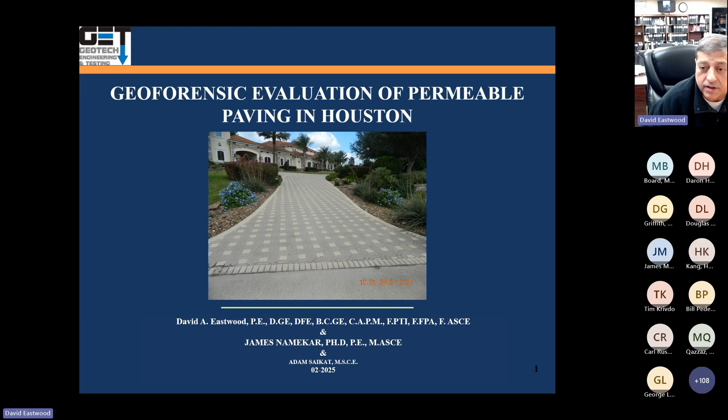Permeable pavers are used in residential and commercial projects, and they kind of work like a detention pond, essentially, underneath the paving. Today we have a lot of engineers that have registered.

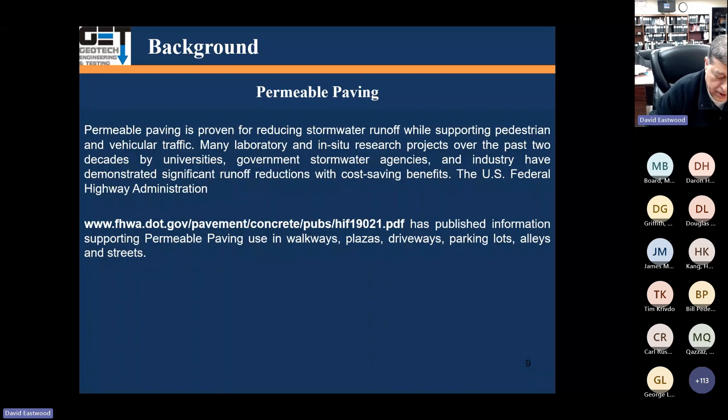cost saving benefits in terms of storage. FHWA has got a good program on that, so you can look at the FHWA manual on permeable pavers.

Typical use of the pavers, you see them all over the place. If you go to the City of Sugar Land, you can see this out there. They have pavers out there, some of them are permeable, some of them are not. And the City of Sugar Land, you see them all over the Woodlands area, so they've got them all over the place.

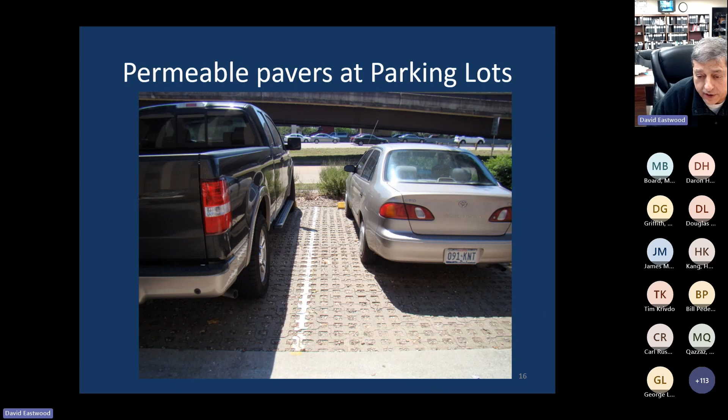They use them for parking. This is Harris County flood control. You go out there and they have this parking area where they've got pavers, permeable. Again, there's parking lots, more parking lots.

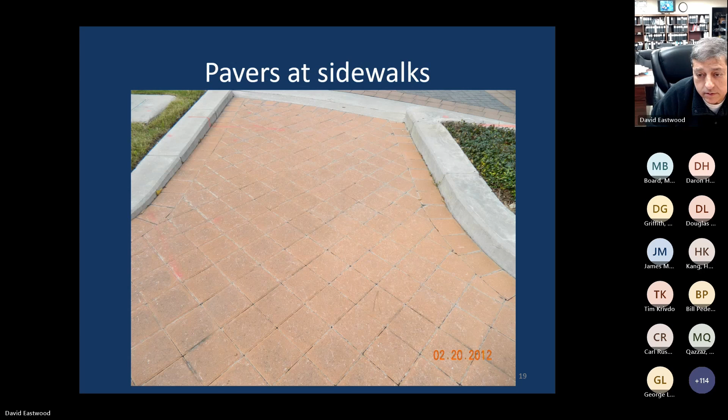That's a typical kind of sidewalk deal. Again, some of these are permeable, some of them are not. Sidewalks, driveways, more driveways.

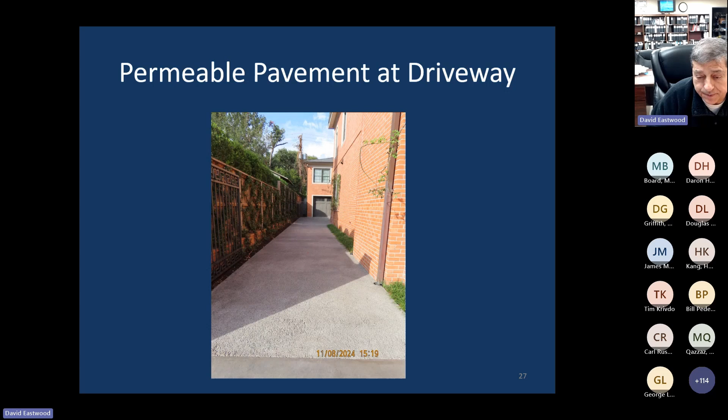That's permeable paving here, really a good system out there. We're going to test this thing here. Permeable paving is made out of aggregates and concrete. Water flows right through it very easily.

Permeable pavers: the typical design on these things, you can see the paver itself, with an open graded bedding course underneath it. Below that, you've got an open graded base reservoir, and the sub base underneath of that is also open graded. Open graded means the aggregates have voids in them and don't have a nice gradation.

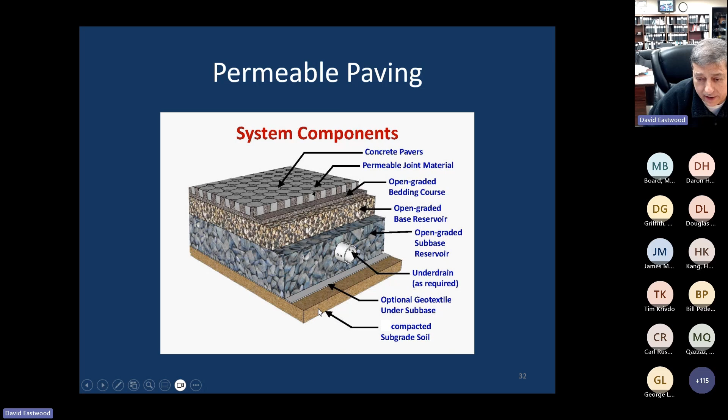And then, if you need a drain, underneath that you've got the geotextile fabric - most of them do have that - and the compacted subgrade. These subgrades should be stabilized if you've got heavy traffic. If you're doing a driveway or a little parking lot, you may not need to stabilize it, but we recommend stabilization.

Here's another drawing from Keystone that shows the paver. They've got the layer of aggregate in here, the bedding course, basically about 2 inches of number 8 stone, and below that they come in with a 4-inch minimum thickness of number 57 stone.

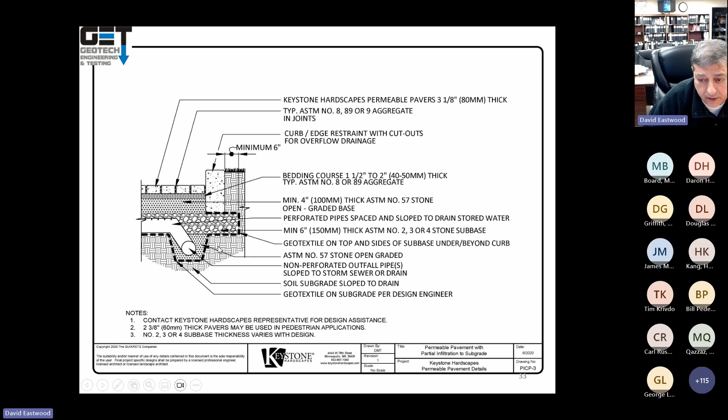Below that they come in with, of course, here's the geotextile, here's another set of aggregates, and then you got the drain pipe. So it's kind of involved. And here is the subgrade, which has got to be compacted.

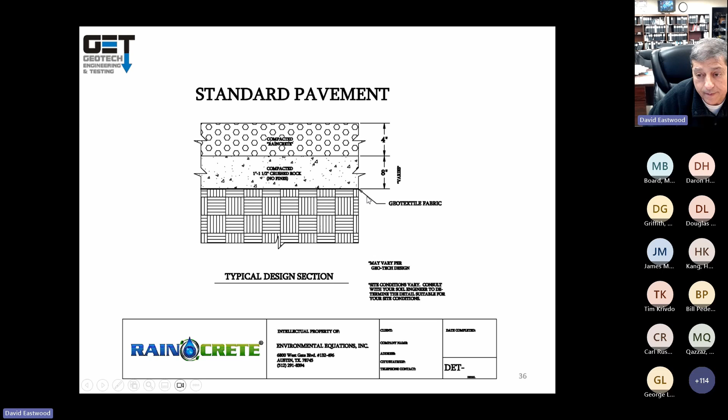Here, it'd be really nice to stabilize this. If it's clay, lime stabilize it. If it's sandy soil, you do lime fly ash, like 8 inches, before you put this in for pavements. And definitely for heavy pavements, you got 4 and 8 geotextile fabric. Again, we recommend lime stabilization in clay, 8 inches, or lime fly ash in sandy soils. Makes it last a lot longer.

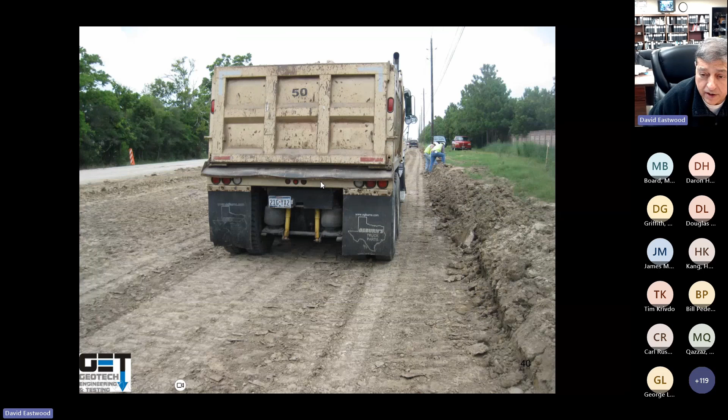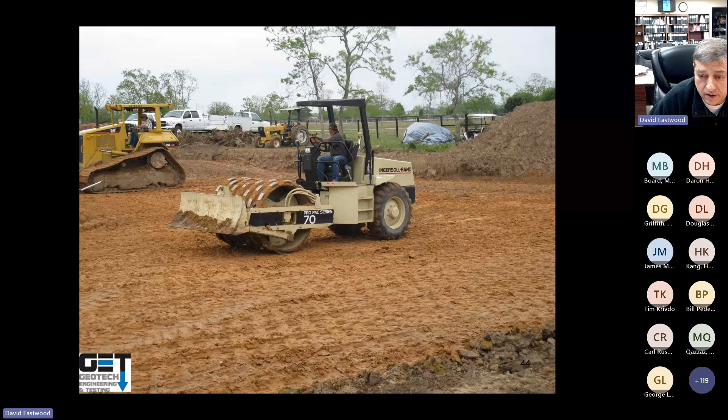Construction wise, you got to go out there and do the proof roll on that subgrade. Get a loaded dump truck, about 25 to 50 tons, and run on it. Make sure you don't have rutting, it's not acceptable. You got to compact that soil, if it's clay, with a sheep's foot. And if it's sandy, of course, you compact it with a steel drum roller. Make sure it's nice and compacted, 95% standard Proctor density.

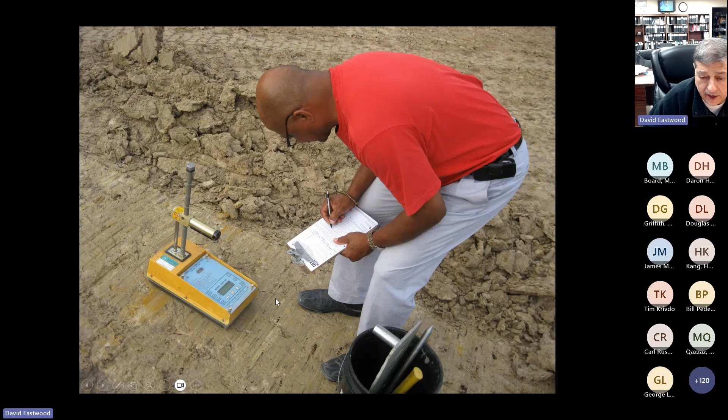That's the compacted soil with a sheep's foot. You run the density test with a nuclear gauge, make sure this passes the density. Again, if you got heavy loads on it, like a roadway or something, I would recommend chemical stabilization, lime or lime fly ash, depending on the soil. If your soil is clay, use lime. If it's sandy, use lime fly ash.

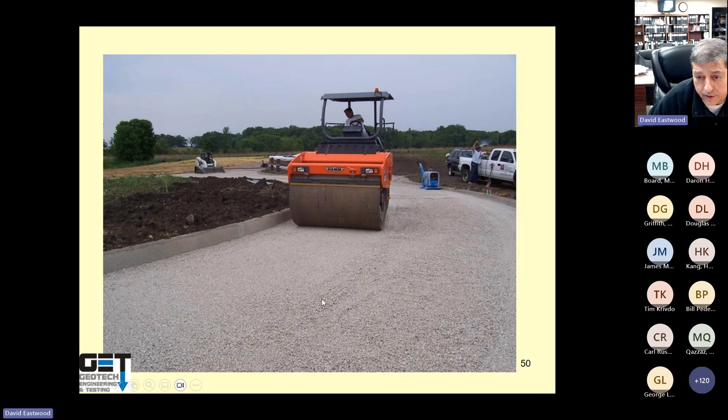And then you put your aggregate on, compacted aggregate. Here's a steel drum roller going out there and compacting it. Make sure you run density tests on the base, make sure everything is nice and compacted, 100% modified Proctor for compaction for your base material.

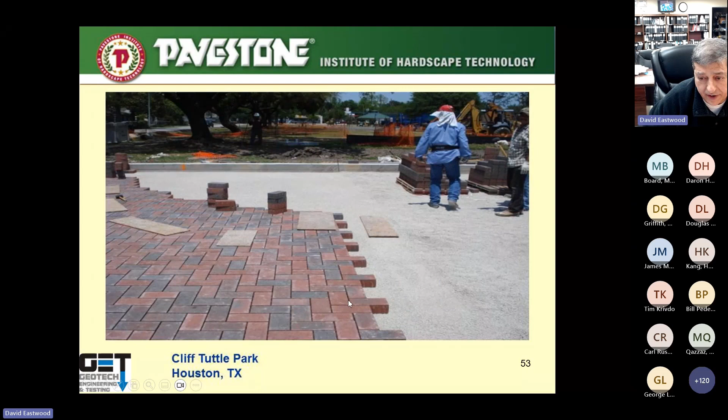And to start putting the paver on, you lay it out there, put them right next to each other. Typically, if you got permeable pavers, you got aggregates in between the pavers. Here's another slide showing the base, and then you put the paver on top of it.

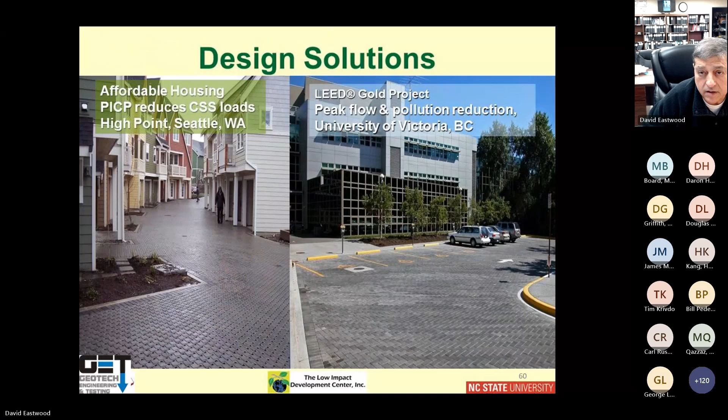Traffic loading, again, as we discussed, we use this for parking lots. These are various uses of pavers. They're beautiful, you can carry loads, you know, you got a fire truck.

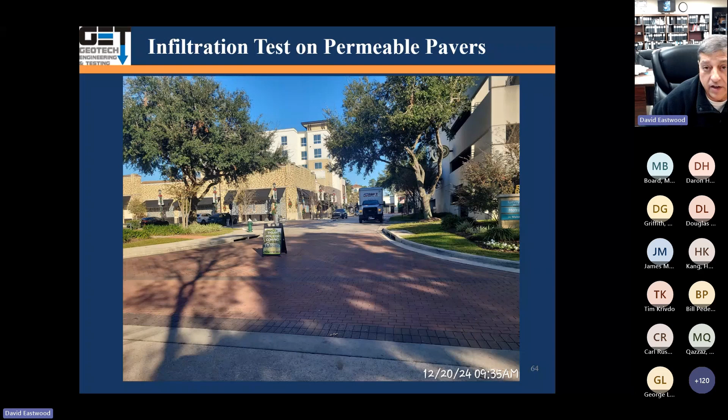So, road reconstruction. One of the things we want to know is, for some of these pavers, what kind of infiltration they have, how much water can go through them. So we picked a location and used this device, a kind of cylindrical thing, about 12 inches in diameter, 24 inches tall. This is the ASTM standard for running the test.

You go in there and put some plumber's putty in there because we don't want it to leak. Put it in, and then you slide that on top of it.

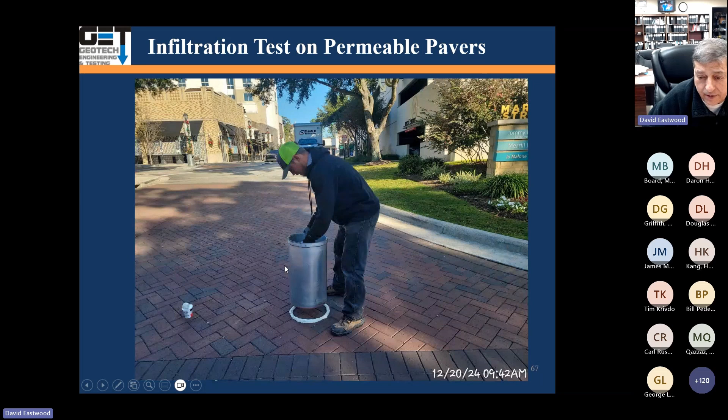Still don't see any questions, so I don't know if there is a question or not. But anyway...

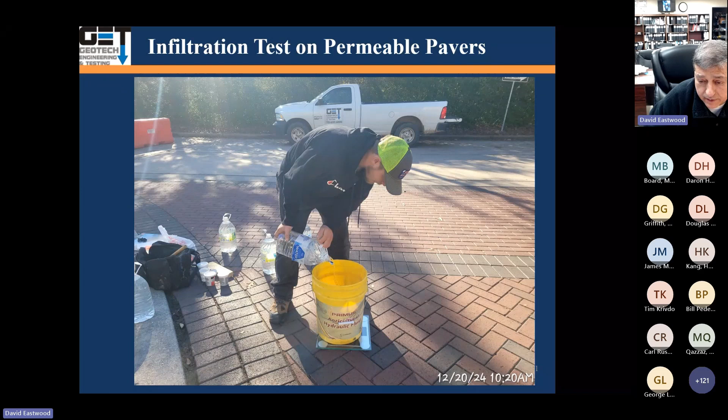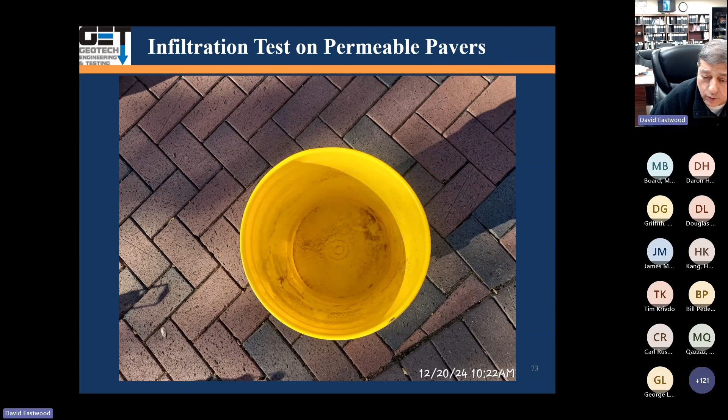You put that cone in there, the cylinder on top of it, and make sure it's sealed. Make sure you seal the inside of it, make sure it's nice and sealed out there. You add water to it, and basically you put a bucket there, you weigh it, and then add water to it. You add about 8 pounds of water, just pre-wet it with 8 pounds of water.

And then you pour water in there. If the water sits there and doesn't go anywhere, you add another 8 pounds. You just monitor it and see how fast the water flows through it. If it goes through within 30 seconds, then you add 40 pounds of water to it, and you monitor the water flow through it.

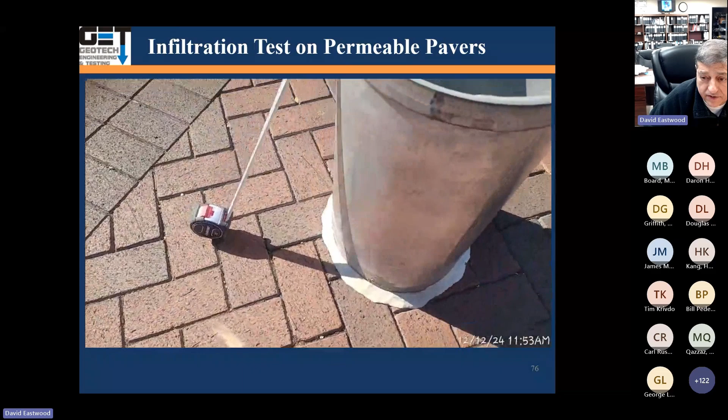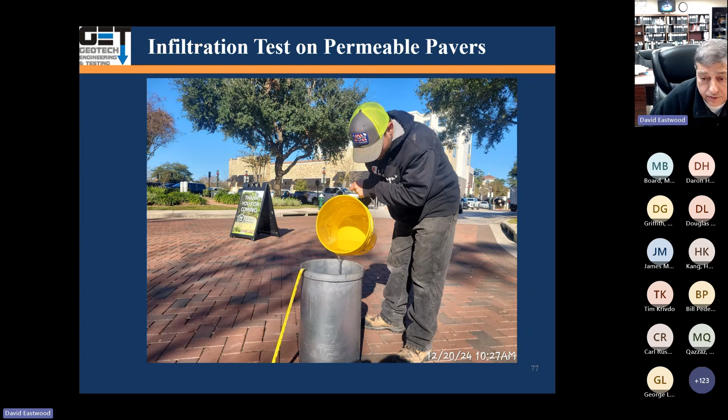This kind of shows the test being run. It's the plumber's putty, you can see the cylinder, and you got the water just sitting there, not going anywhere. If the water's not going anywhere, you add another 8 pounds of water to it, and try to run the test. And if it's going somewhere, you measure the infiltration. In this case, water starts flowing.

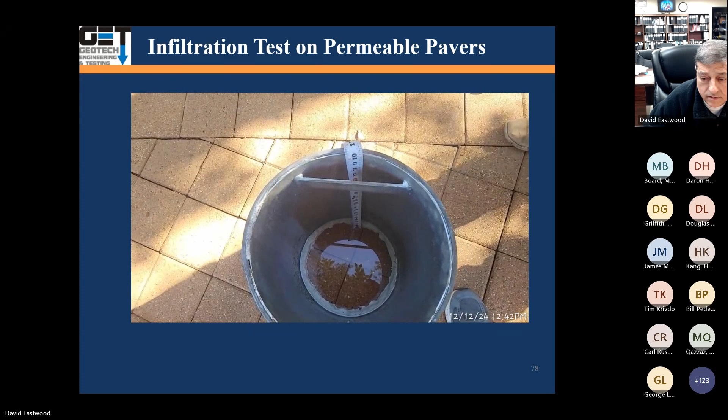We picked up a case study for a project that had permeable pavers, Rain Creek—that's the commercial name for it. They wanted to know how permeable it was. It was basically a case where there was a dispute about how permeable these permeable pavements are. So we compared that to natural soils, and we compared it to concrete paving, and of course to permeable pavers. For that, we did field work, field exploration, lab testing, engineering analysis, and results conclusion.

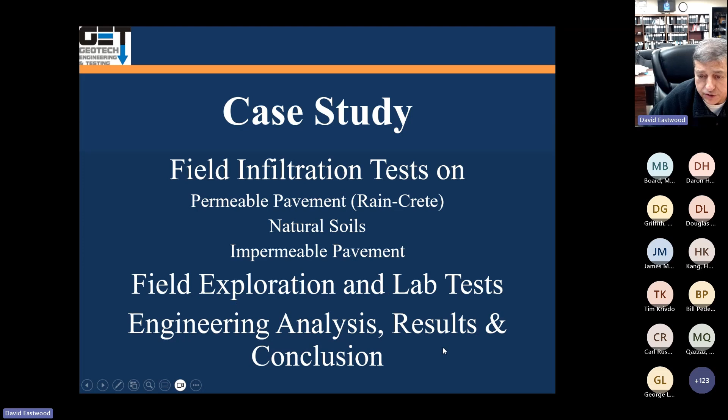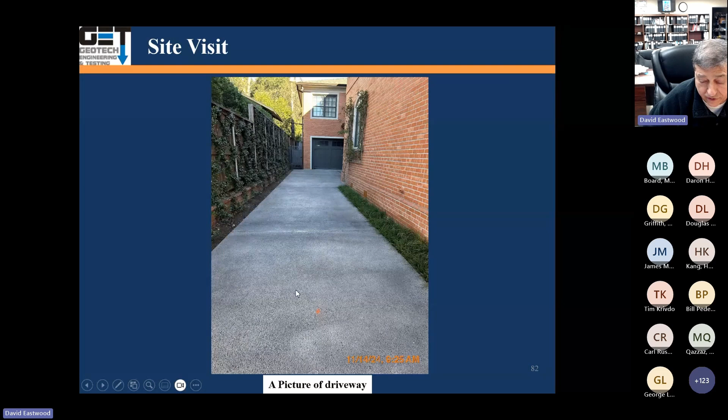The infiltration test we did was according to ASTM C1781.

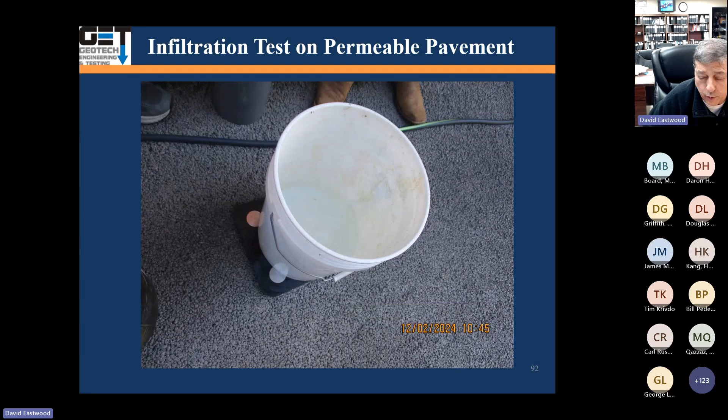Here's the pavement. We put the cone in here, the cylinder, and put the plumber's putty, weighed the water. We pre-wet it with 8 pounds of water. Within 30 seconds, all that water went away. Here's pouring the water, and you can see how permeable this paver is—the water just runs right out of there.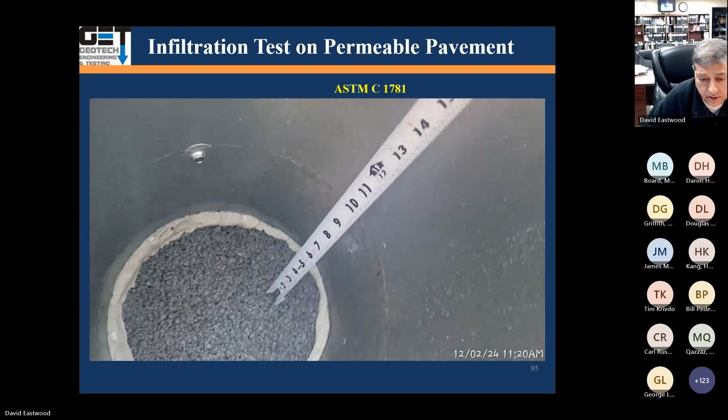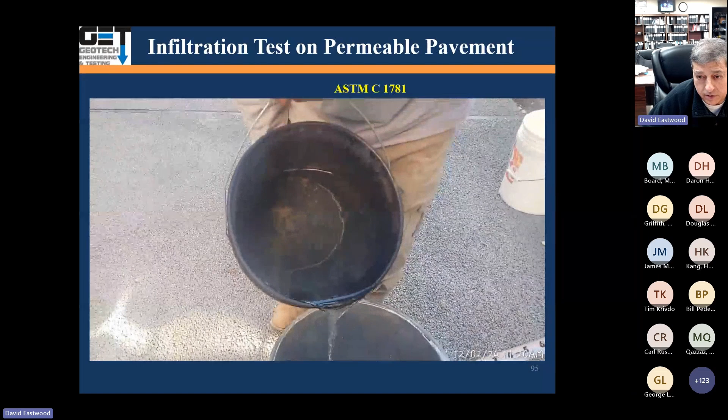You can't hold any water. That's a very permeable paver there. Then we pour more water in there—a whole bucket of water. It still wouldn't hold it; the water just flows right through it.

It's a great system, this drain-crete system is pretty good. Underneath it, it's got gap-graded rock, a limestone base.

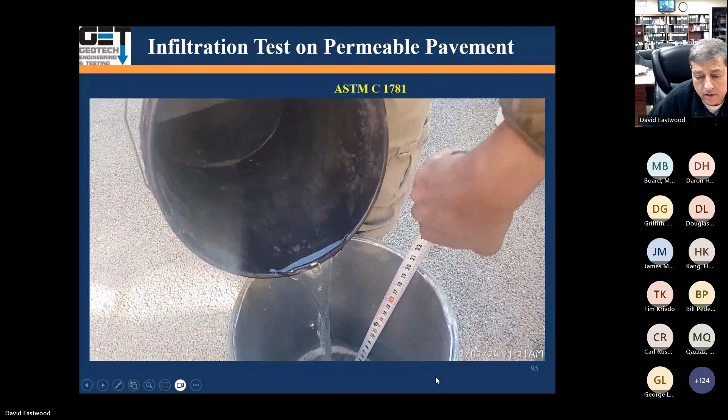So any water we put in there just went away. We took it off.

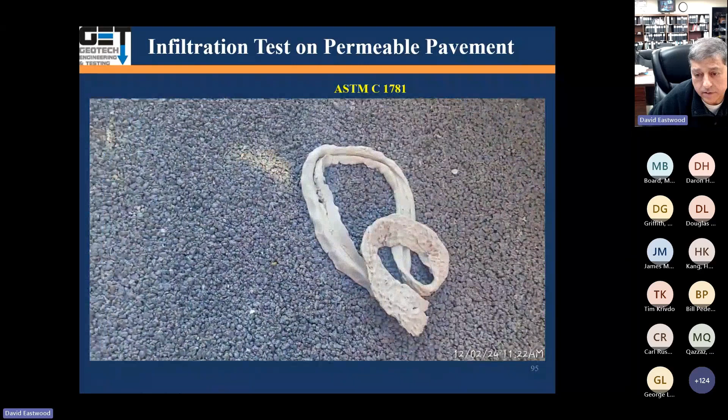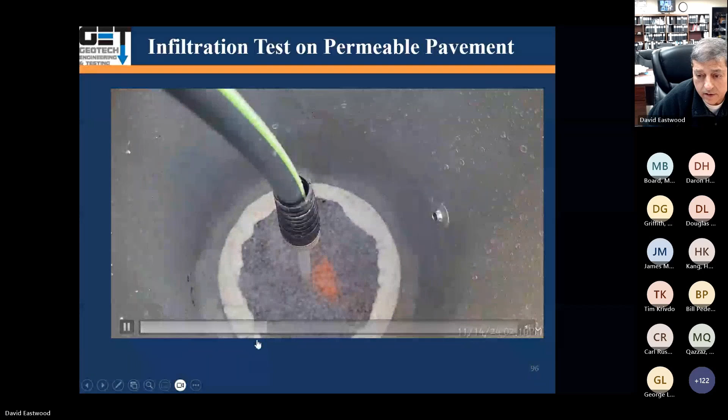Here's another one—we actually put a water hose in there because it used up all the water in the bucket. So in this test, we just put a water hose in there to see how much water it can hold, and it just sucked up all the water. It's so permeable that even with a water hose in it, this thing basically drains right through.

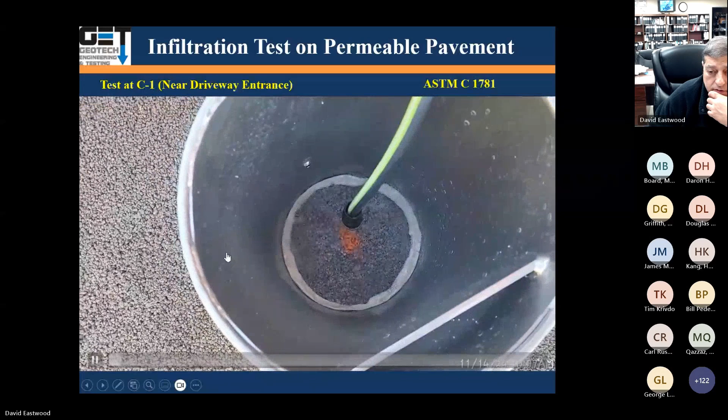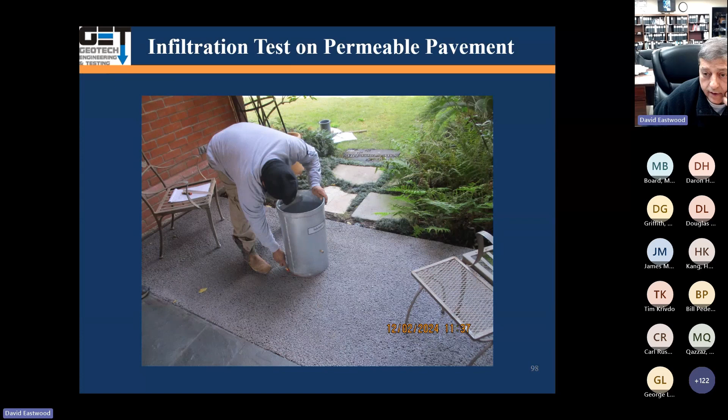Here's another one, Test C1, near the driveway entrance. We ran another test out there on another part of the permeable paver. Again, put the cylinder there, put the putty on it, put water in it, pre-wetted with 8 pounds. Within 30 seconds, all the water went away. Again, the same thing—put a lot of water, a bucket of water, at that test location, and you can see how permeable it is.

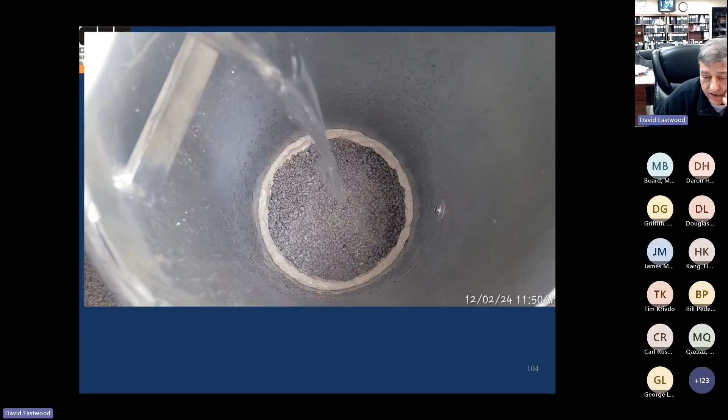In fact, you put a hose in there, it does the same thing—it uses up all the water. Basically, all the water will go through. They're just pouring water and the water goes away.

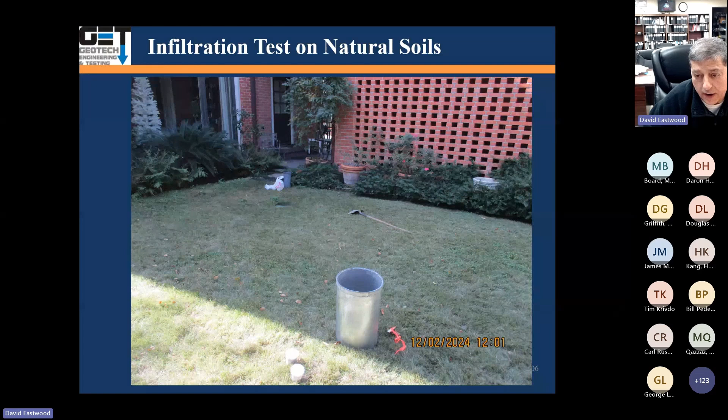Now, one of the things we did—we said this is permeable, but they wanted to compare that to the natural ground, because the attorneys will say we want to show this is more permeable than natural soils. So we went out there and set the cylinder up on top of natural soil, drove it into the soil, and got ready with 8 pounds of water, along with the plumber's putty.

You can see in here, you've got the grass. We start pouring water in it; it starts holding water. We pour more water in it; it was holding water. The water did dissipate within 30 seconds, so we had to add another 40 pounds of water to it.

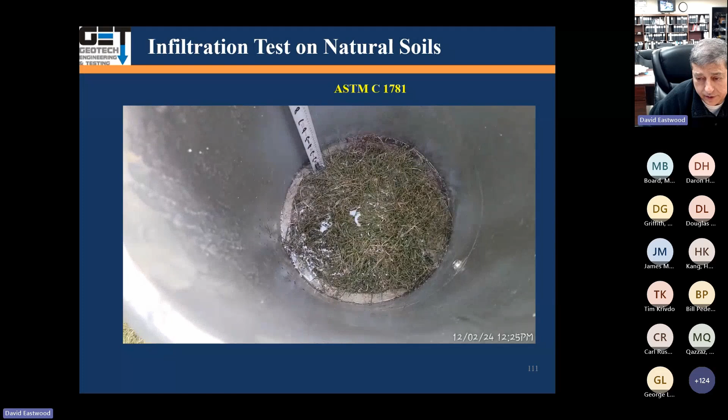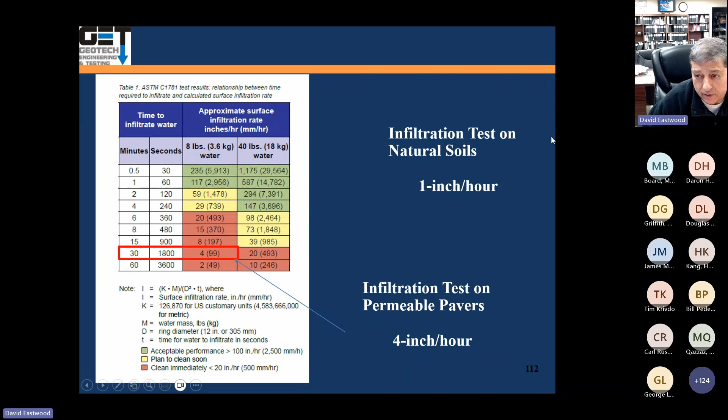We measure the water drop as a function of time. In this case, for natural soil, we found it was 1 inch per hour—the head dropped 1 inch per hour. For the permeable paver that was dirty, it was 4 inches per hour. So basically, natural soils were pretty bad—only 1 inch per hour—there wasn't that much drainage on natural soils.

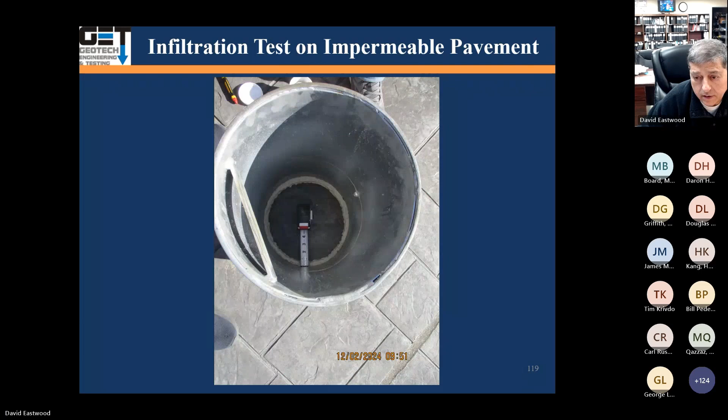So the attorneys asked us, why don't we just do the infiltration test on regular concrete? We went out there—they had a concrete driveway, solid patterned concrete. We set it up, weighed this thing, and put the plumber's putty, sealed it, and started to add water to it.

Again, this is patterned concrete. We expected it to hold water, that no water would go away. So we poured the water, it was sealed, and it just sat there—didn't go anywhere. We measured permeability of 0 per hour. We monitored for 1 hour, 60 minutes—it was 0. The water just sat there.

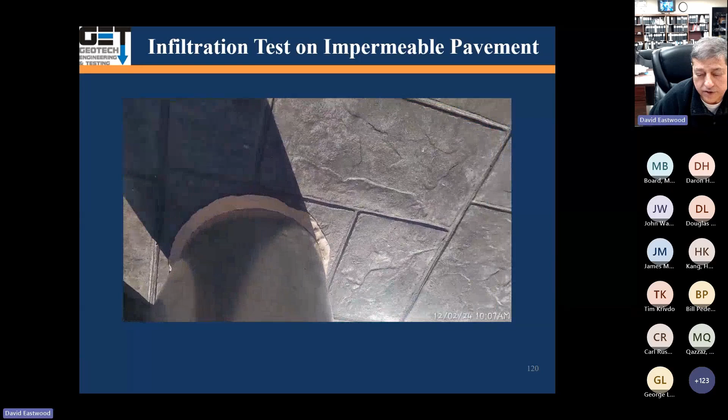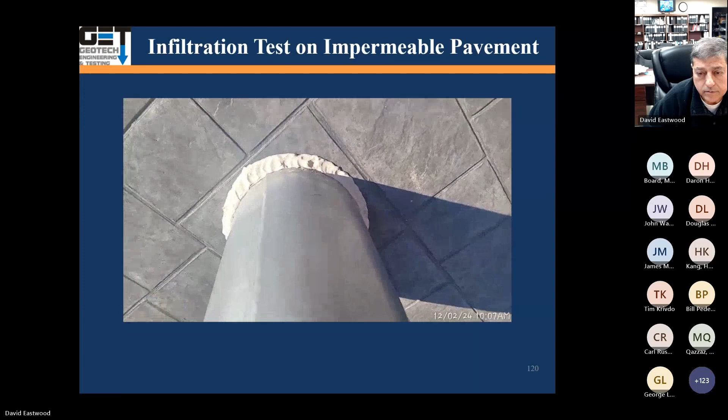So here's another video. We poured more water in there, 40 pounds of water, to see what it does.

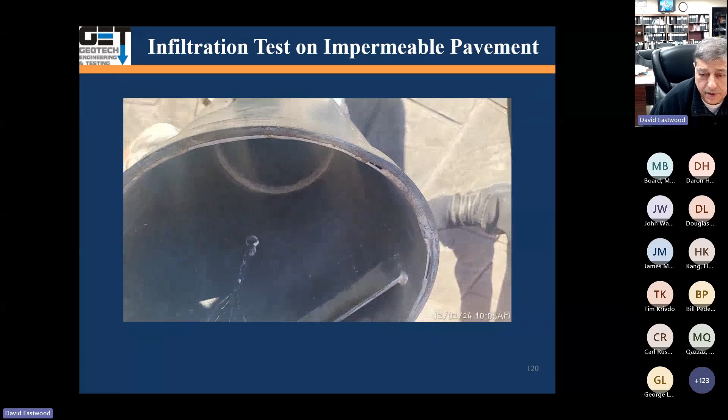And as you can see, water just sits there. It doesn't penetrate anywhere. That's impermeable, regular pattern concrete.

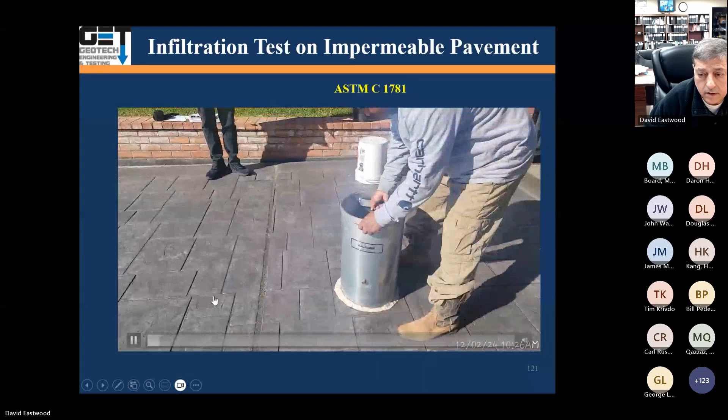So we took it off. All the water came out of the bottom. We put more water in there again, and water came out. So pattern concrete had a permeability of 0.

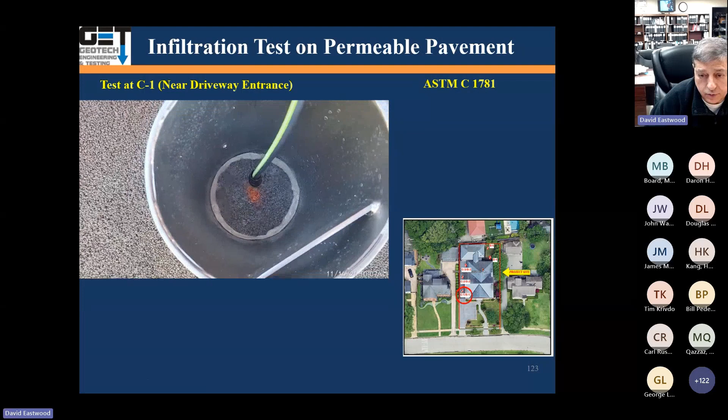Again, on test C1, we put a hose in it right here on that driveway. This shows no matter how much water you put in there on the permeable pavement part, water just basically goes away into the reservoir of the aggregate underneath it.

So it's an awesome product. You can see the water just going in there. That's test number C2.

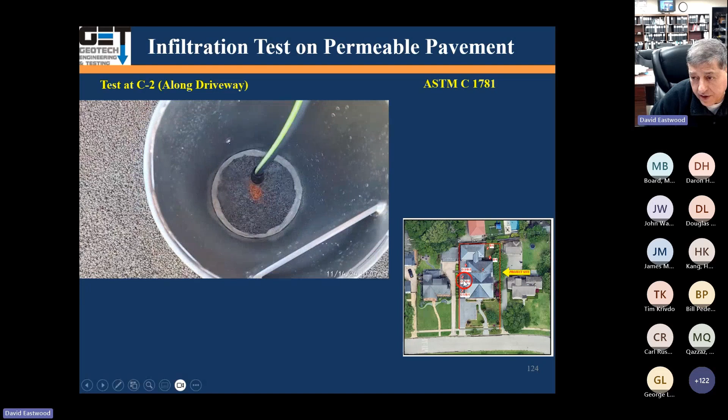This was C1, C2, and we have, of course, C3, where we did the impermeable tests on this natural soil.

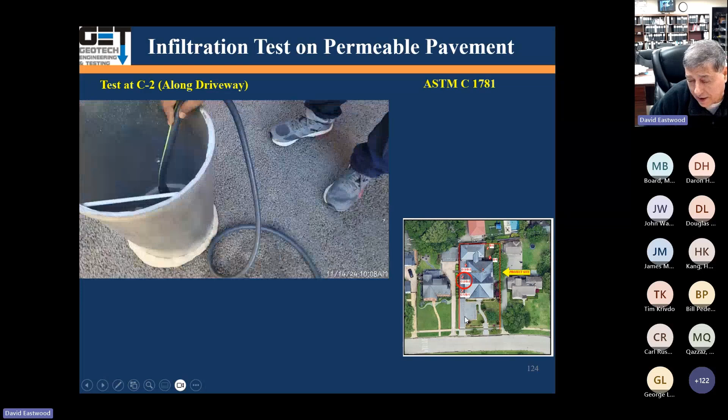And here's the impermeable paver right here, this regular pattern concrete. This is C2. We put a hose in there and just everything goes.

So what we measured, based on ASTM C1781, C1, C2, and C3, we had more than 1,200 inches of water per hour. I mean, that water just flew right through it.

What natural soil was, the permeability was 1.0, which was 1 inch per hour. For impermeable concrete right here, we had 0. The water just sat there, didn't go anywhere.

...drains at a rate of about 1,175 inches per hour, which is very close to what we measured here for permeable pavement. So they are equal.

So a good permeable paver drains as good as the raincrete we tested, unless they're dirty, then they've got to get cleaned up. Natural soil was 1.0, impermeable concrete was 0.

So we went out there to see what we got over there on those permeable pavements, what the structure of it was. We did some coring, drilling, sampling, and backfilling.

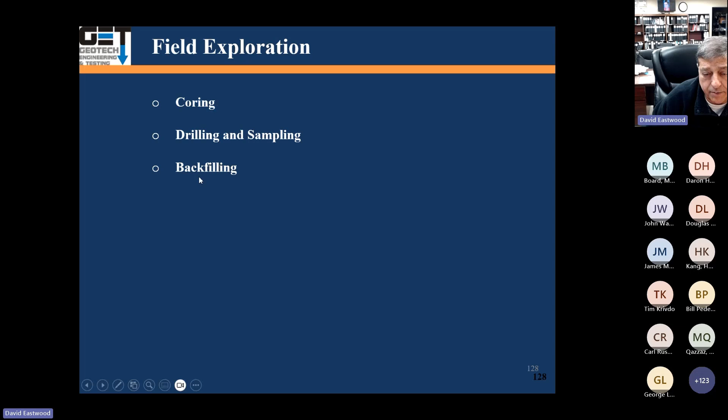So the design was 4 inches of compacted raincrete permeable pavement for a residential driveway. Below that, we had 4 inches of gap-graded limestone, and below that, we had natural soil, compacted.

Key specification for raincrete, which is the material that was used for permeable pavement, over natural soil, compacted without debris or waste. They said the system will have a permeability of about 288 inches per hour. Our test showed greater than 1,200 inches per hour.

Base material consists of ASTM C33 concrete aggregates: 100% passing number 1.5 inch, 95% to 100% passing 1 inch, 25% to 60% passing through half an inch, and 0 to 10% passing number 4.

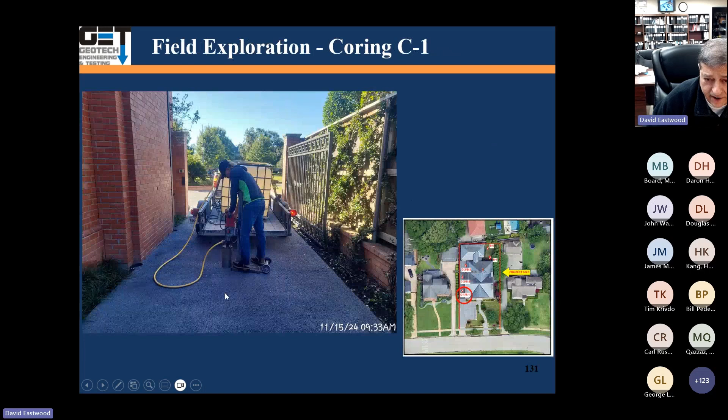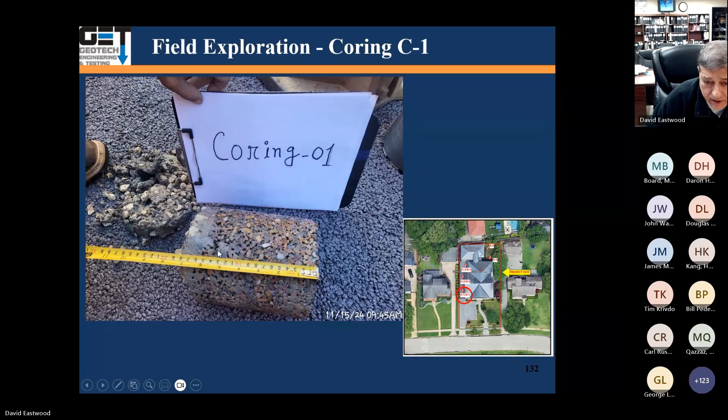So we cored this thing here. That's coring C1, and that's what the aggregate looks like here. Basically, raincrete—you can see it like that. It's got gap-graded aggregates.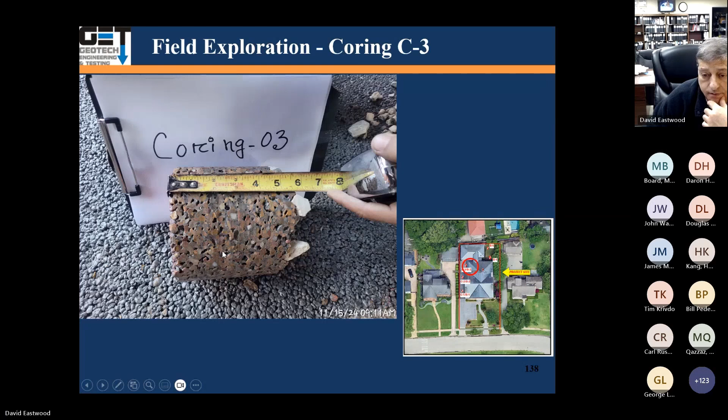Below that, we found this aggregate. It's a limestone aggregate, gap-graded aggregate. We tried to get some sample underneath it.

We found fabric and then natural soil. It was a sandy clay material, lean clay. We used a portable rig we have to get our sample.

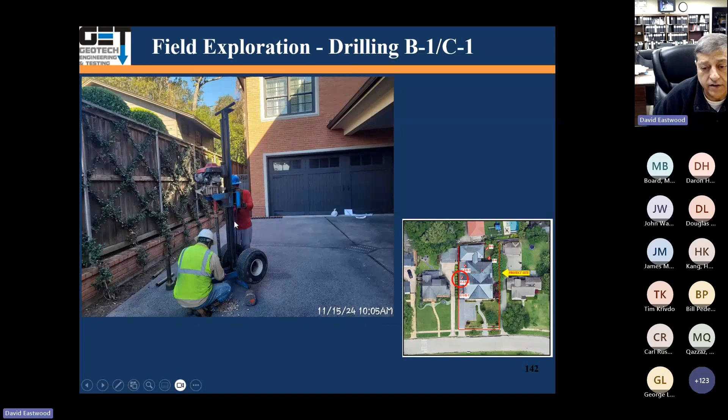We did the same thing with the natural soil. We went in the backyard to see what kind of soil we have there, and we got samples of it. After we got the sample, we backfilled the hole with gravel.

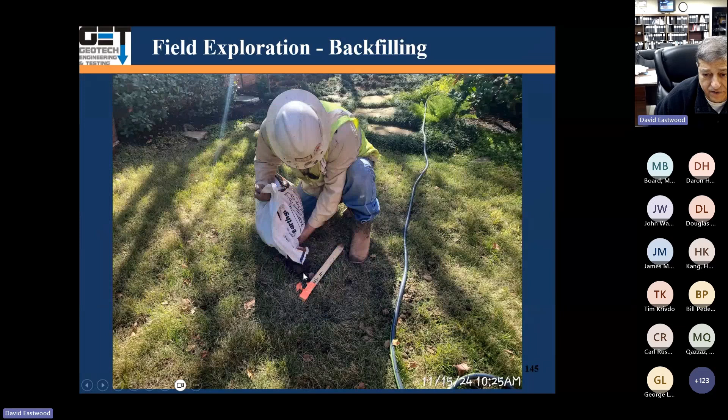Well, actually, in the backyard, we used the topsoil to backfill the holes, and in the paver areas, we used aggregate to fill the hole. They had to come back in and repair them.

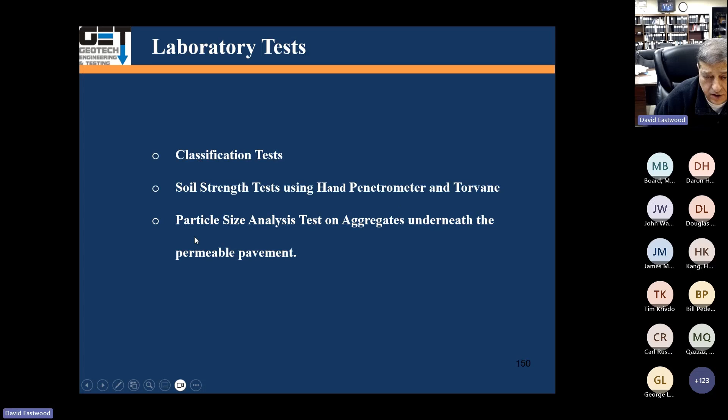Laboratory testing: we did some classification tests, strength tests, and gradation tests on the aggregates. The soil, basically, we found 0 to 2 feet consisted of lean clay with PIs between 18 to 29, strengths of about 0.31 to 0.62 tons per square foot.

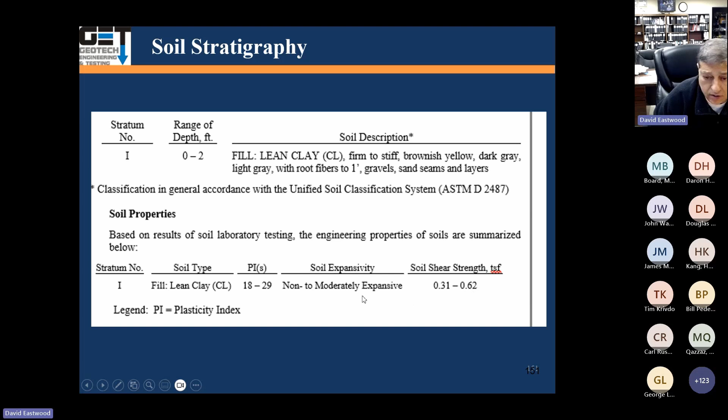Moderately strong, low PI essentially, 18 to 29 is not that expansive. We talked about the specifications of the raincrete.

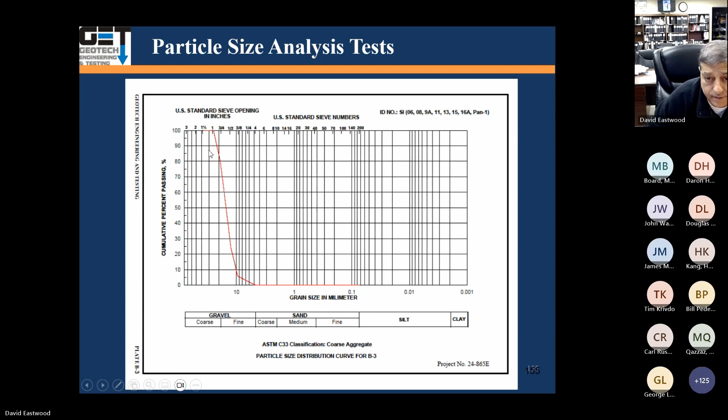So basically what we did, an engineering analysis: we looked at permeable pavement structure, field infiltration tests, and comparison of infiltration rate in permeable pavements and permeable pavers, natural soils, and impermeable concrete.

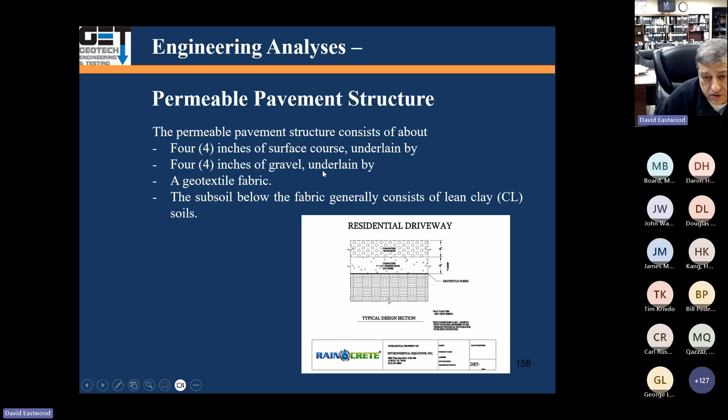For a residential driveway, we had 4 inches of this raincrete, that 4 inches of surface course underlain by 4 inches of gravel or limestone. Then a geotextile fabric. Subsoil consists basically of lean clay.

And the permeabilities that we measured: for clean pavers and permeable pavements, the flow is going to be more than 1,200 inches per hour. For natural soil, we measured 1.0, or 1 inch per hour. Of course, impermeable was 0.

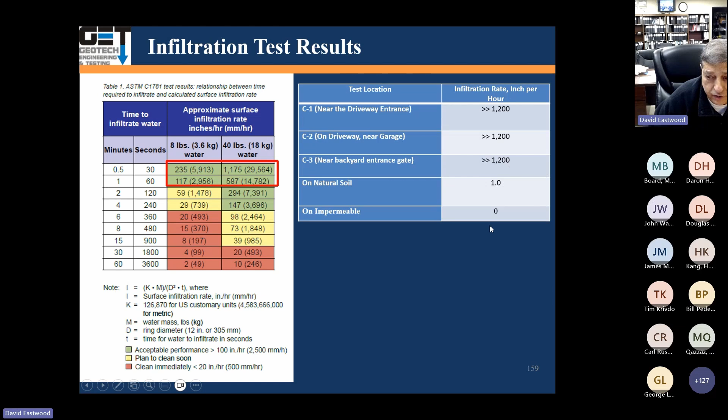So the field infiltration test, a review of the infiltration test for the pavements, indicates that infiltration tests for pavers and permeable pavements is more than 1,200 inches per hour. Infiltration test in natural soils was 1 inch per hour based on resultant infiltration tests. Permeable pavement permeability is much greater than natural soils for infiltration.

Comparison of infiltration rate of on-site permeable pavement and permeable paving. The infiltration rate for the permeable pavers we tested was 4 inches per hour, which was dirty. The infiltration rate for permeable pavement we measured was 1,200 inches per hour. The infiltration rate for natural soil was 1 inch per hour. For concrete, solid concrete, it was 0.

Therefore, permeable pavement had superior infiltration rate compared to permeable pavers, although they're going to have very similar infiltration if the permeable pavers are clean.

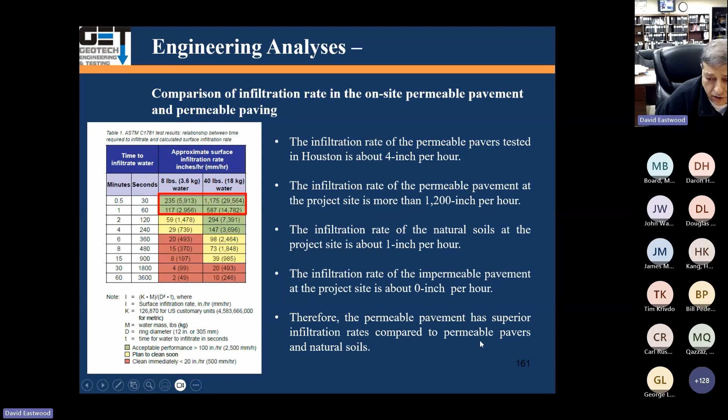Based on the results of our analysis and field and laboratory test results, it is our conclusion that the permeable pavements at the project site in Houston are permeable, because the homeowner association was claiming these things were impermeable. We showed that these permeable pavers are permeable.

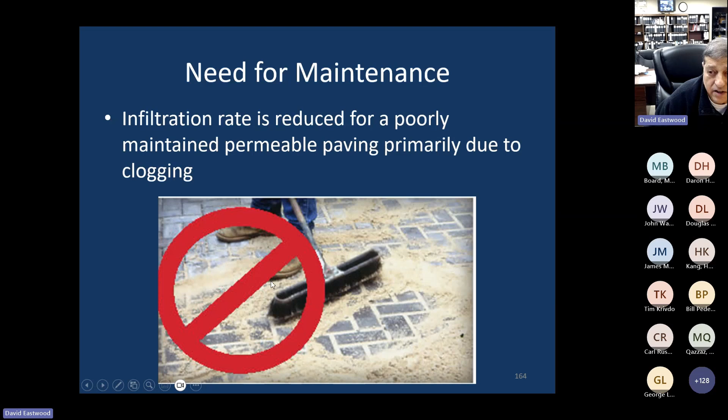One of the things we have to do with the permeable pavers is make sure it's not dirty and it's cleaned properly. So you can't just fill it up with sand. Basically, a clean one needs to have a permeability of about 1,200 inches per hour, or it says 1175.

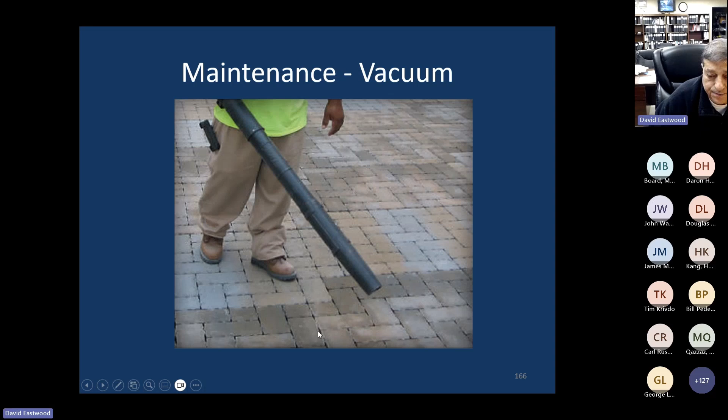You can blow this stuff out of the seams in here, and put aggregates in them. You can vacuum it, pressure wash it. You'll clean it up with a pressure washer.

If you're doing landscaping and you put soils on top of it, it's going to plug up all the permeable pavers, so you don't want that. You want to put plastic underneath it when you do landscaping, so that these permeable pavers do not get clogged up.

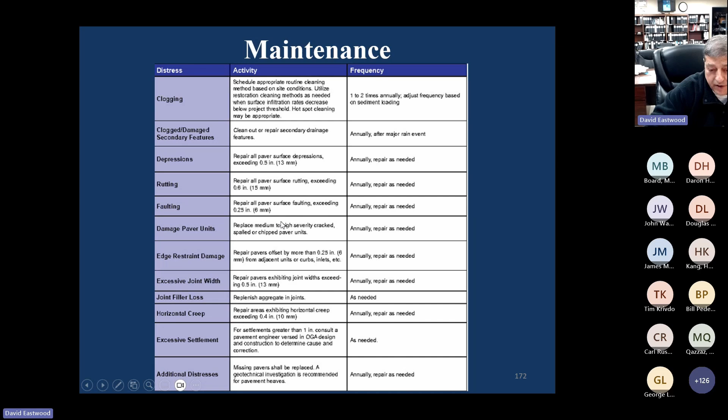Questions? I don't know if you can do questions on this. Again, we're still working on the technical end of this thing here. I don't see any questions. Any questions?